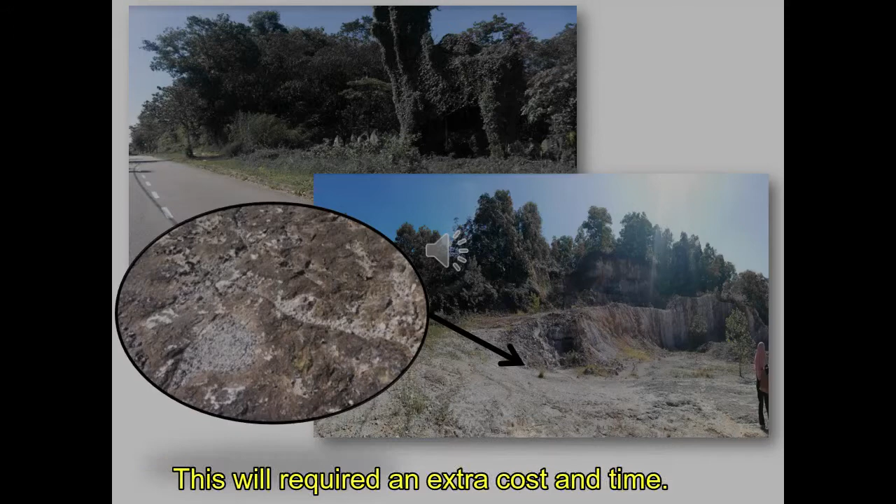These are the front view and back view of the proposed site. Site preparation work such as earth moving, cutting and excavation works, and an extra work which is blasting is required, as there are lots of stones on the proposed construction site. This will require extra cost and time.

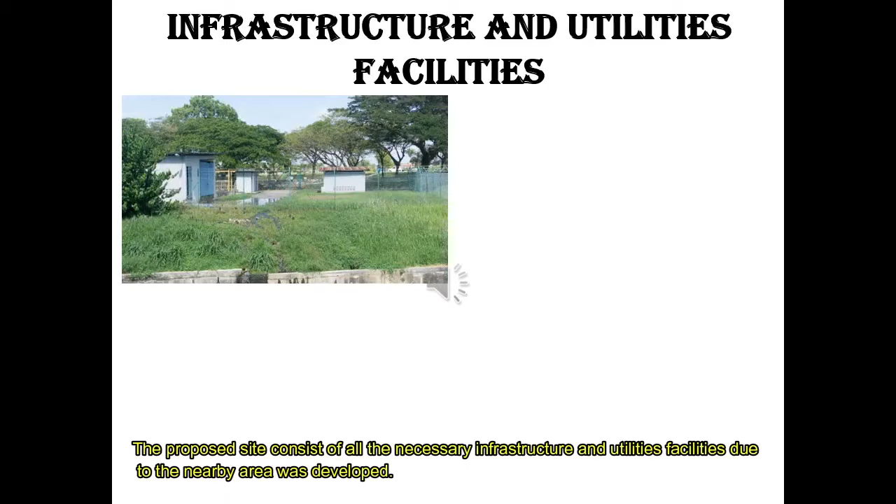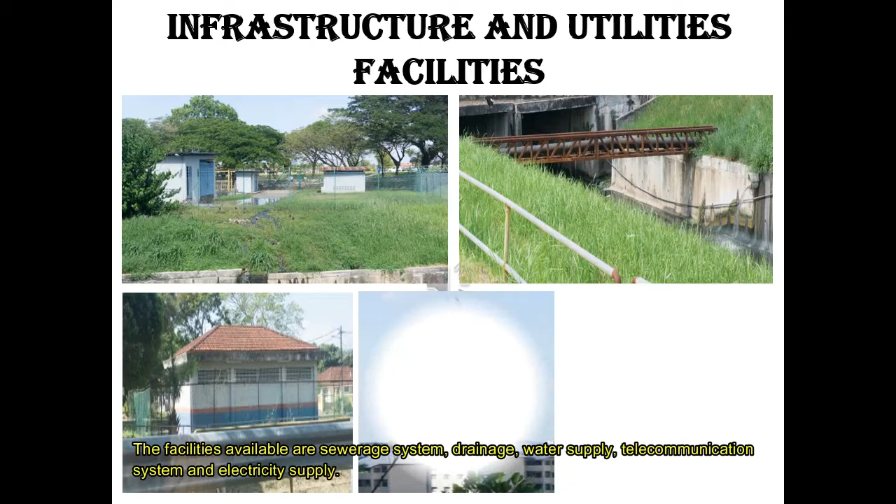Whether the infrastructure and utilities facilities exist nearby the proposed site is very important. The proposed site consists of all the necessary infrastructure and utilities facilities due to the nearby area being developed. The facilities available are sewerage system, drainage, water supply, telecommunication system, and electricity supply.

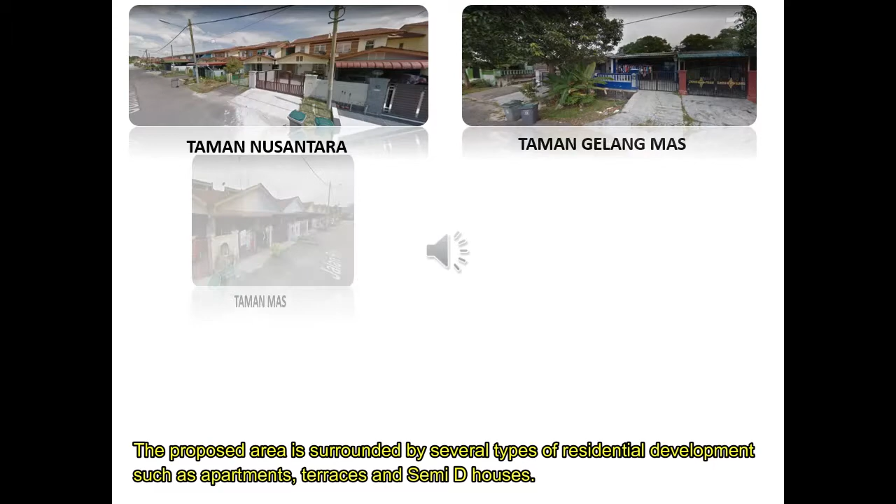The proposed site for our project is close to Jalan Nusa Perintis, Malaysia-Singapore second link, Lebuhraya Nusajaya, and Lebuhraya Kota Iskandar. Therefore, all materials and plants needed for construction work should be arranged on schedule to avoid any consequences and traffic jams. The proposed area is surrounded by several types of residential developments such as apartments, terraces and semi-D houses.

There are many commercial buildings such as shop lots, hotels, restaurants, and others. There are lots of public developments located near our proposed site such as schools, police station, fire rescue station, One Malaysia Clinic, prayer hall, futsal court, and football field. Furthermore, our proposed site is also located near many famous shopping malls, leisure parks, and transportation lines.

Southern Industrial and Logistics Clusters, SILC, is the main industrial area in the Iskandar Puteri region. The industrial development would create many employment opportunities for the residents in the nearby area.

The Majlis Bandaraya Iskandar Puteri consists of 6 administrative areas such as Iskandar Puteri, Sekudai, Gelang Patah, Kangkar Pulai, Tanjung Kupang, and Tanjung Pelepas. The proposed site is located at Gelang Patah under Mukim Jelutong.

According to the Department of Statistics, the total population for Johor state is 3,742,200 people, whereas in Johor Bahru district the total is 1,386,569 people in 2010. Johor Bahru makes up 37% of Johor's population and is targeted to achieve 2 million people in future development.

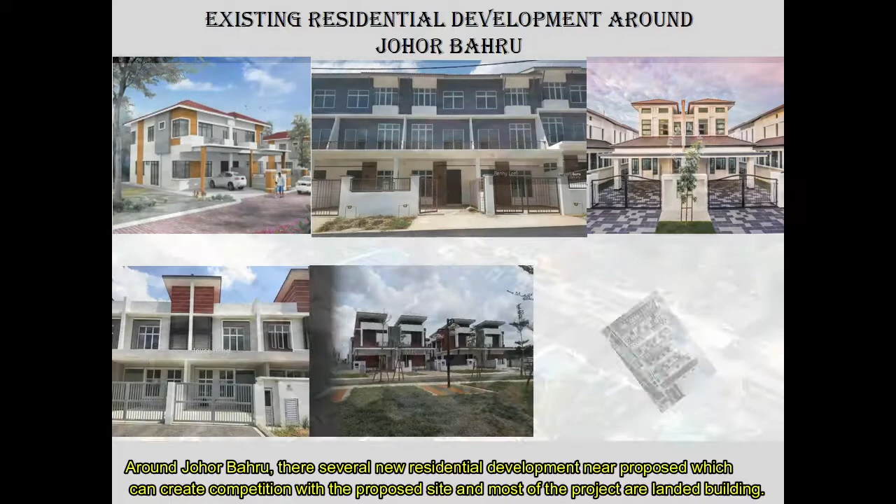Trading and business involve study on the economic development surrounding a certain area. Around Johor Bahru, there are several new residential developments near the proposed site which can create competition, and most of these projects are landed buildings.

There are various commercial developments within the area of Gelang Patah and its neighboring areas such as Bazar Mydin Anjung Nusajaya, AEON Mall Bukit Indah, Tesco Bukit Indah, Mall of Medini, Legoland, and Paradigm Mall. These commercial developments consist of retail, entertainment, and F&B space, and are places created to bring together the very best elements of urban life under one roof.

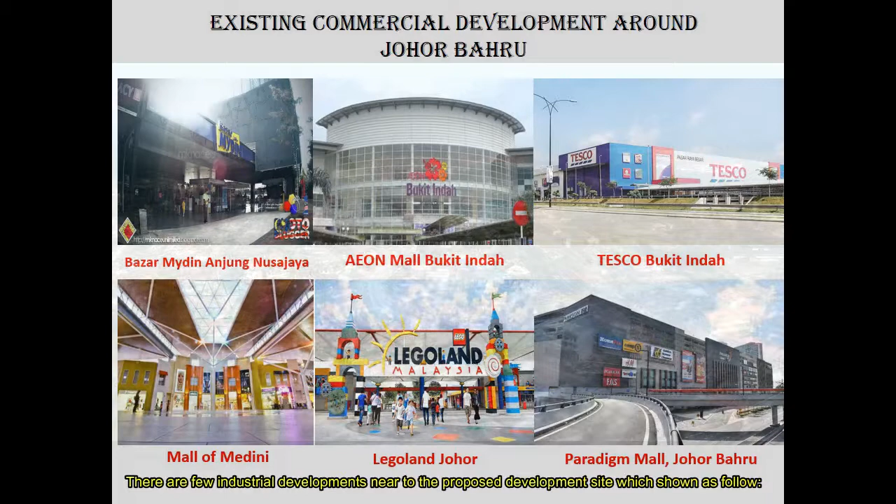There are few industrial developments near the proposed development site, shown as follows: iPark at Senai Airport City, Senai; iPark at Indahpura, Bandar Indahpura; and Eco Business Park 1, Tebrau, Iskandar Malaysia.

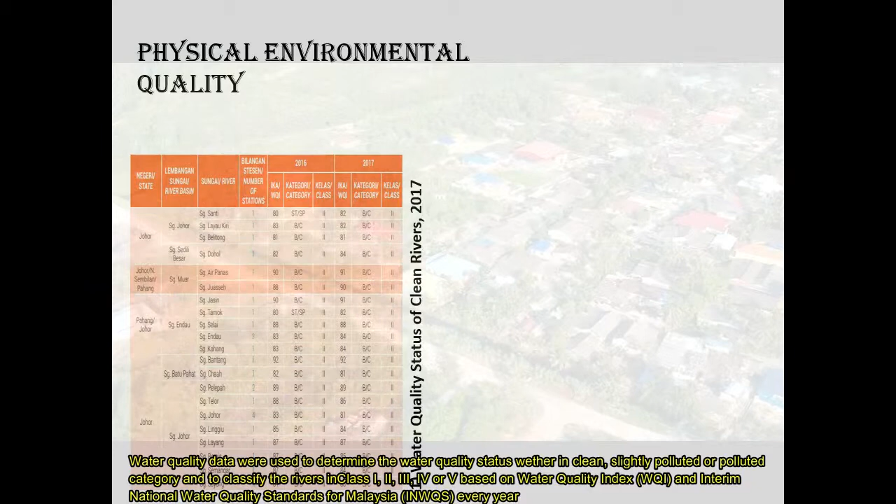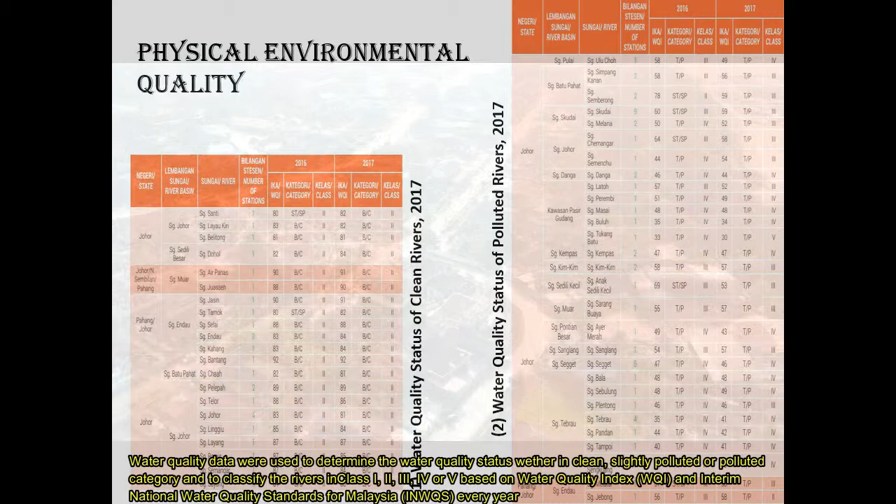A total of 1,064 manual stations are located within 143 river basins throughout Malaysia. Water quality data were used to determine the water quality status, whether clean, slightly polluted or polluted, and to classify the rivers in class I, 2, 3, 4 or V based on the Water Quality Index (WQI) and the Interim National Water Quality Standards for Malaysia (INWQS), every year.

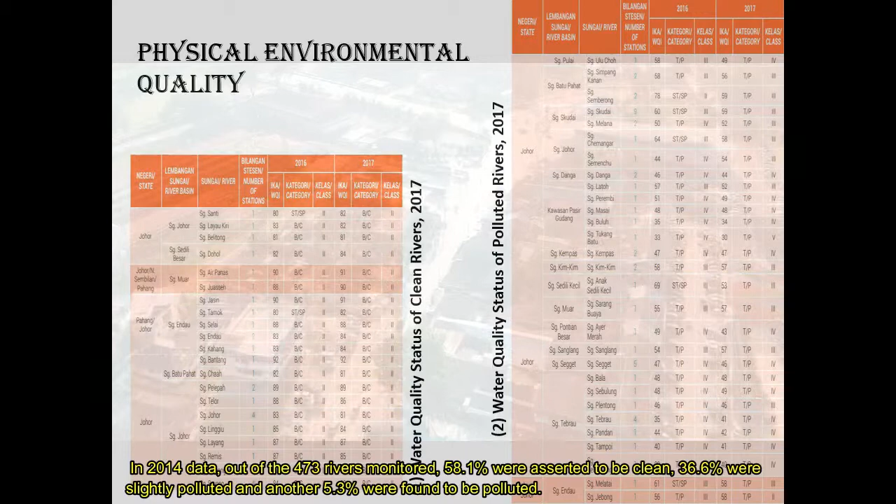In 2014 data, out of the 473 rivers monitored, 58.1% were assessed to be clean, 36.6% were slightly polluted, and another 5.3% were found to be polluted.

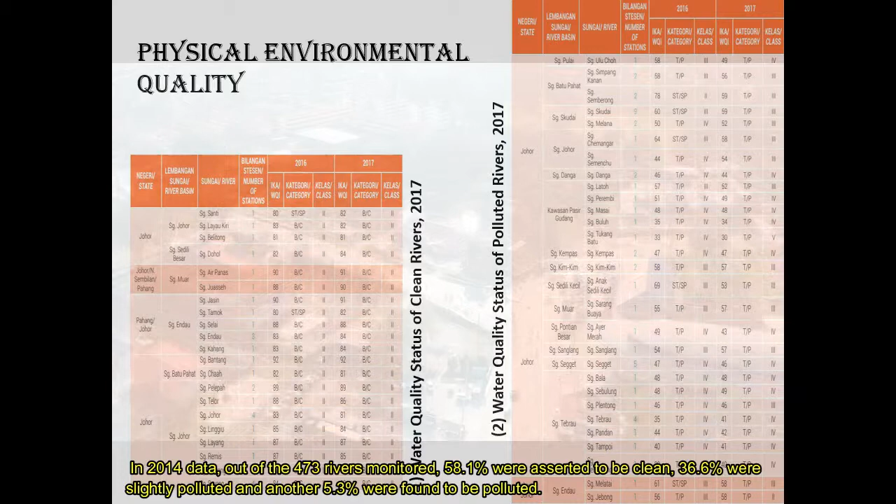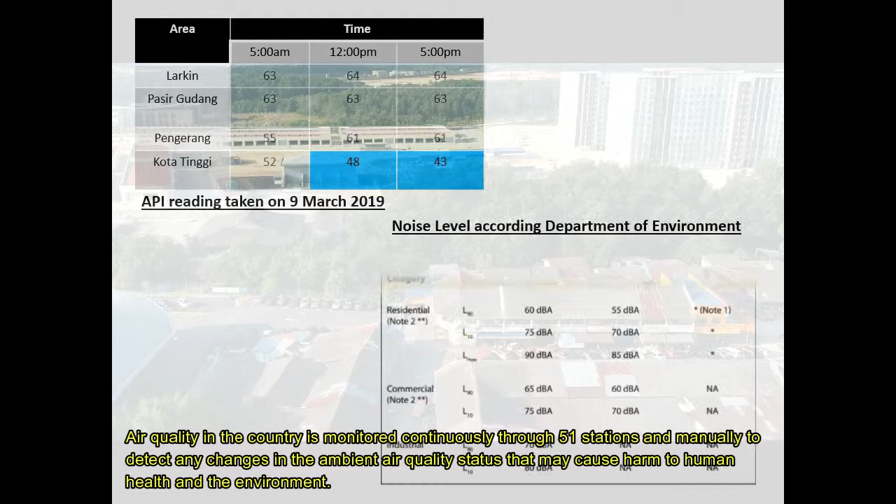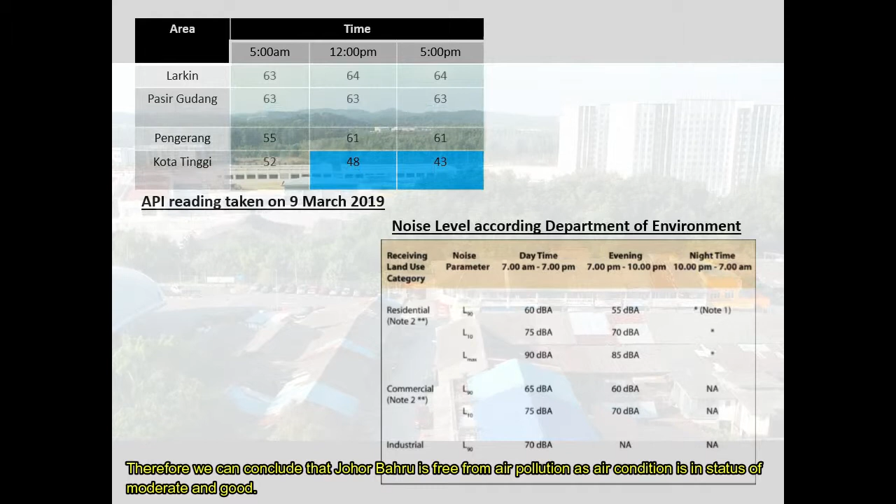Air quality in the country is monitored continuously through 51 stations and manually, to detect any changes in the ambient air quality status that may cause harm to human health and the environment. According to data obtained from DOE Malaysia, the air quality within Johor is still stable. Therefore we can conclude that Johor Bahru is free from air pollution, as the air condition is in status of moderate and good. It shows that the proposed site is free from air pollution.

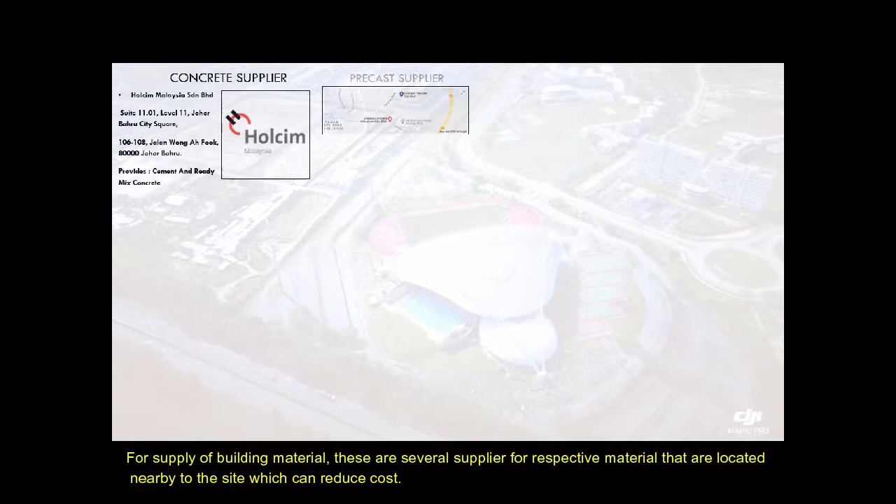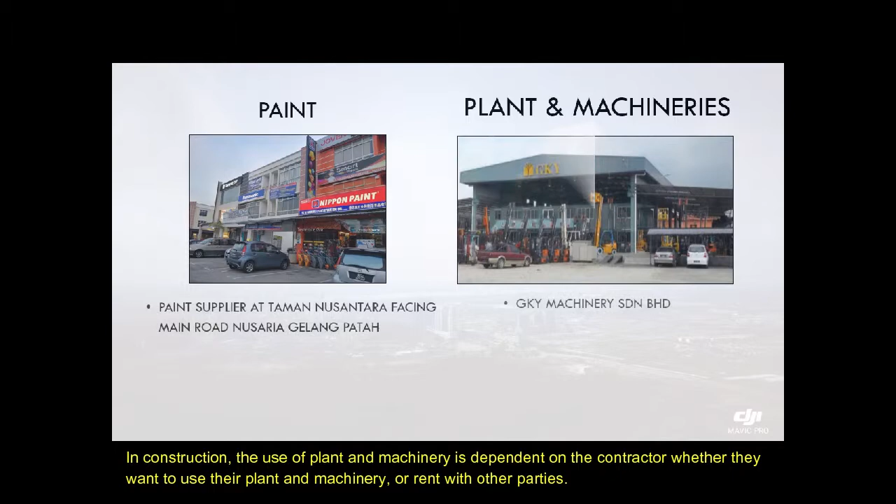For consultant and project team, it is also considered to appoint a nearby consultant firm and construction companies as shown. For supply of building material, there are several suppliers for the respective material located nearby to the site, which can reduce cost. In construction, the use of plant and machinery is dependent on the contractor, whether they want to use their own plant and machinery or rent from other parties.

The Malaysian economy advanced 4.7% year-on-year in the fourth quarter of 2018. The economy of the construction sector also increased gradually from 2015 to 2017. During this period, the value of gross output by sector increased 7.2% per annum. The value added in the construction sector for 2017 recorded RM 72.6 billion. Number of persons engaged and salaries and wages was registered highest by the civil engineering subsector.

Based on the Department of Statistics, labor force participation rate is 69% and unemployment rate is 3%, while the working age population is between 15 to 64 years. Labor force participation rate increased to 68.5% in October 2018. Economic performance of Johor is increasing, as Johor Bahru is the second largest city in Malaysia. According to the Economic Planning Unit, Johor's economy increased from RM 74.1 billion in 2010 to RM 93.7 billion in 2014.

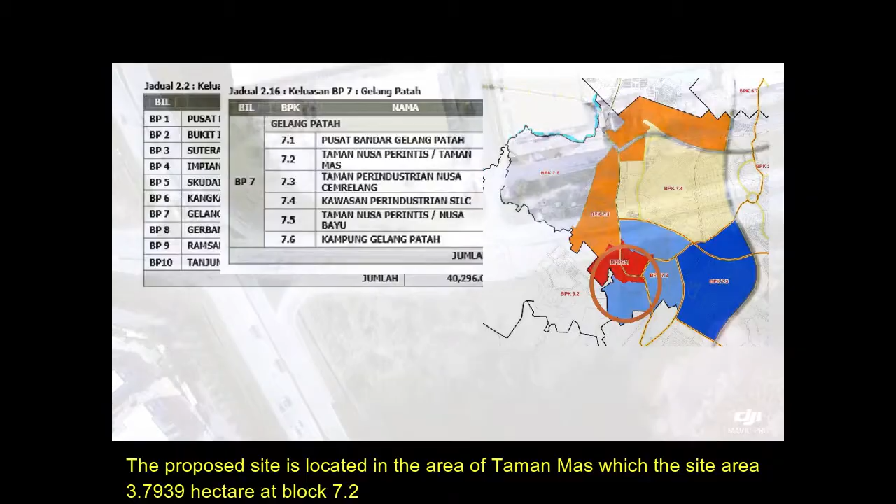The proposed development for this project is located under the administration of MBIP, which covers 56,119.92 hectares of land. The proposed development is at Gelang Patah BP7 and covers 2,267.37 hectares out of the total area of Johor Bahru and Kulaijaya district. The proposed site is located in the area of Taman Mas, with a site area of 3.7939 hectares at block 7.2.

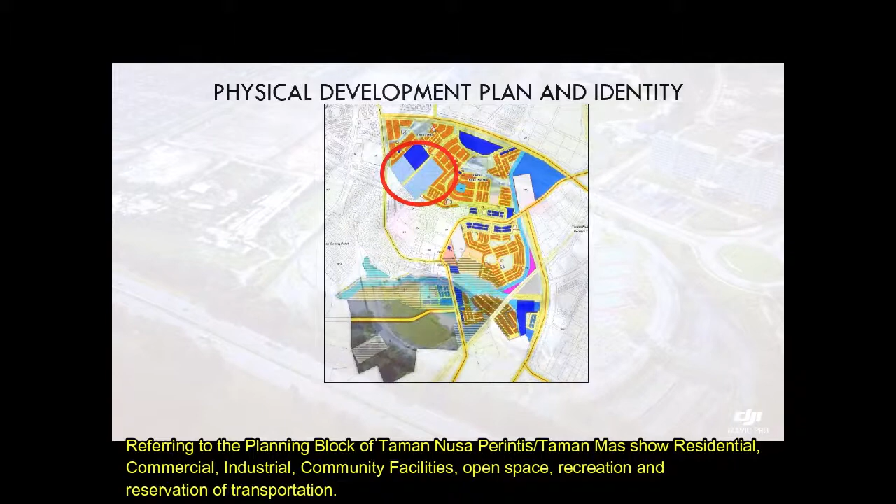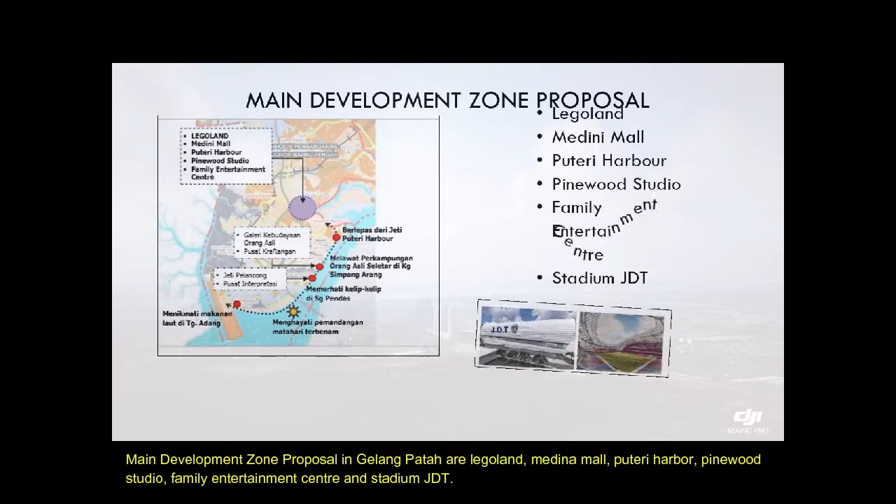Referring to the planning block of Taman Mas, it shows residential, commercial, industrial, community facilities, open space, recreation, and reservation for transportation. Main development zone proposals in Gelang Patah are Legoland, Medini Mall, Puteri Harbour, Pinewood Studio, Family Entertainment Center, and Stadium JDT.

For the SWOT analysis, this project has a strategic location due to its proximity to facilities and malls. The weakness of this project is lack of public transport. This project has high purchasing power from foreign investors such as Singaporeans. The threat is the uncertainty of the global economy currently, which might affect the spending habits of customers.

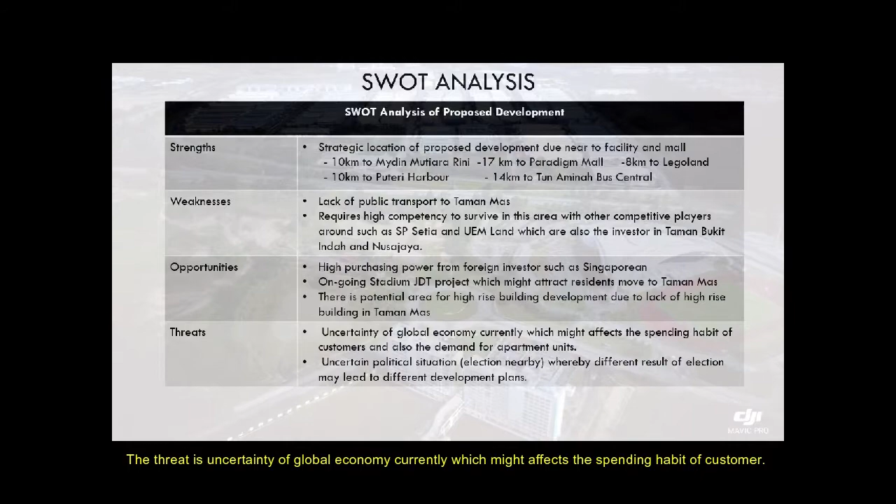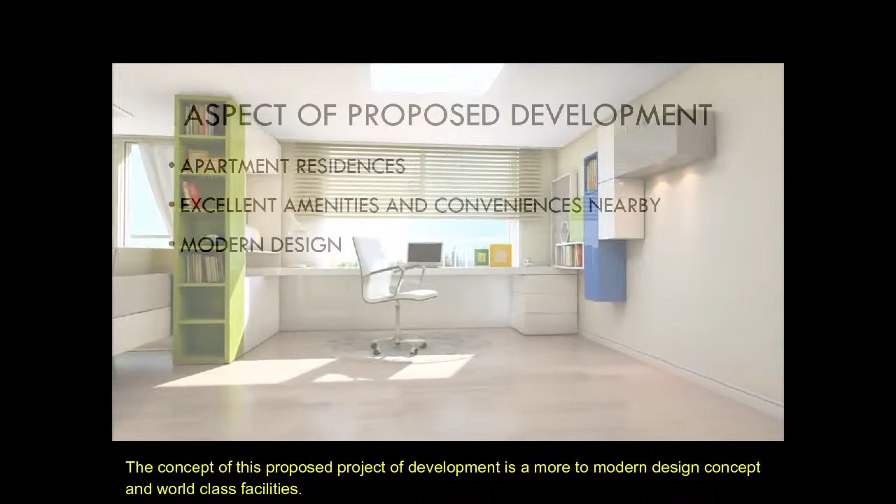The proposed project for the site selection is an apartment residence. It has excellent amenities and conveniences nearby. The concept of this proposed development is more of a modern design concept with world-class facilities. In addition, this building is also expected to have low-cost maintenance but with more protection and uniqueness.

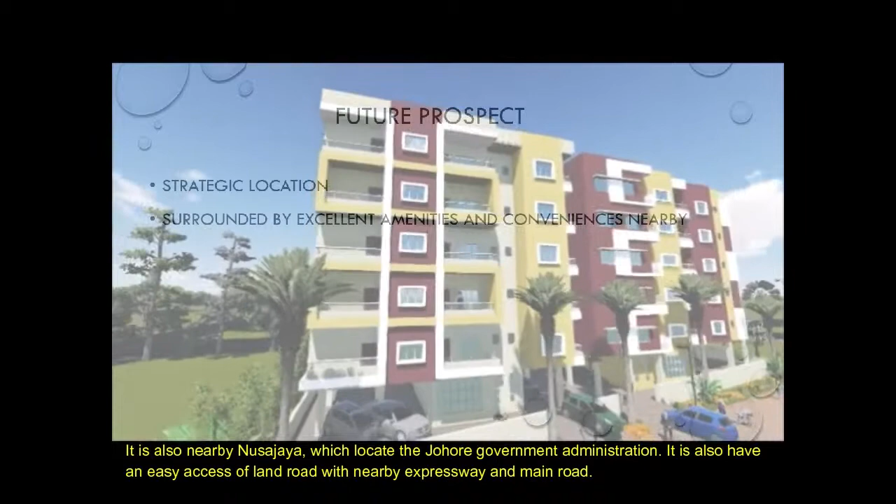For the future prospect, it is expected to be a strategic location as it is surrounded by excellent amenities and conveniences nearby. It is also near Nusajaya, which hosts the Johor government administration. It also has easy access by land road, with nearby expressway and main road.

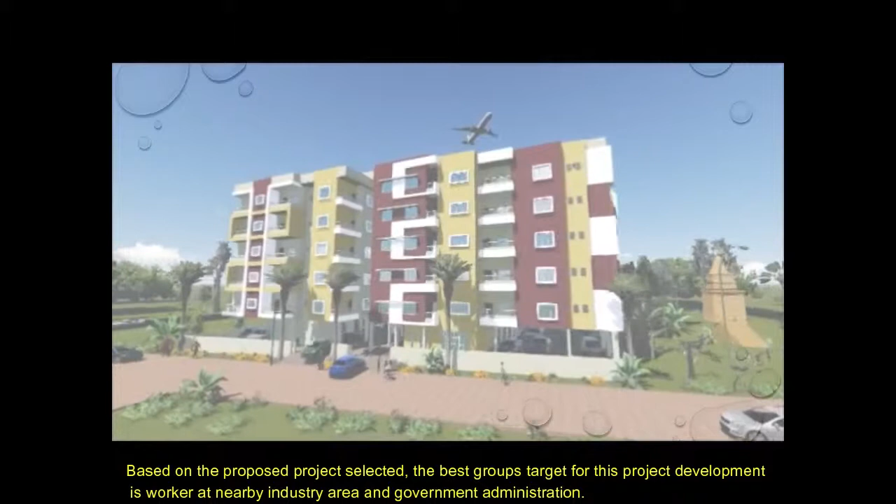Based on the proposed project selected, the best target group for this project development is workers at nearby industry areas and government administration. In addition, property investors might also be interested in this development because it has huge potential, as the surrounding area is rapidly developed.

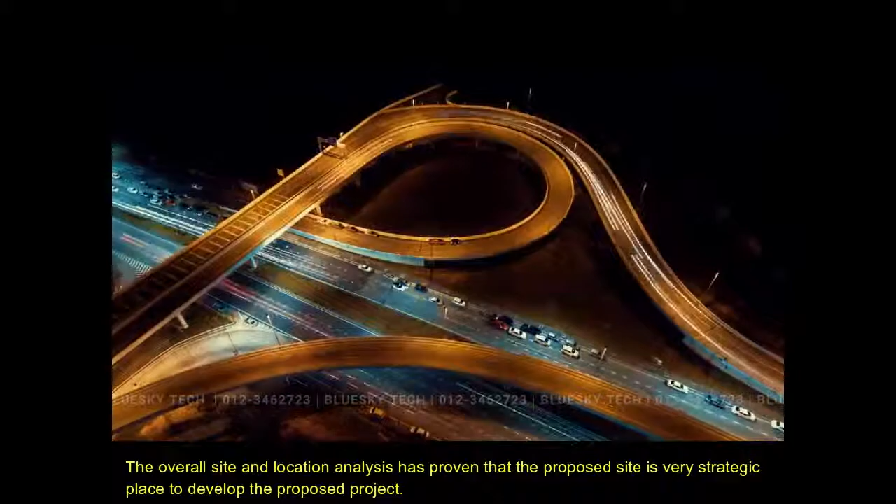The overall site and location analysis has proven that the proposed site is a very strategic place to develop the proposed project. It can be concluded that the existing strengths and opportunities of the proposal will give high potential for the proposed project to succeed.